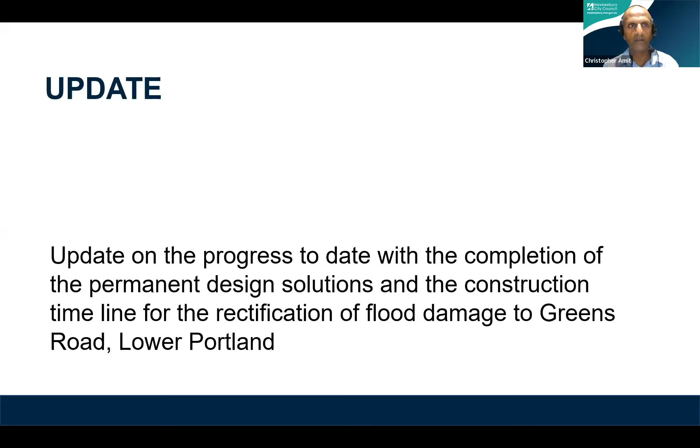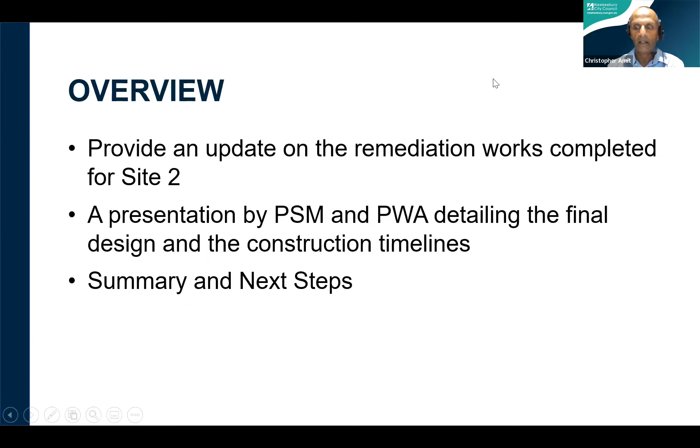So just as an overview, what I'll take you through is give you a bit of an update on what we've done at Site 2 to date, the presentations from PSM and Public Works, outlining the final design and the construction timelines respectively, and we'll summarize and look at some of the next steps.

So just as a bit of background and context, we've got the two sections of Greens Road that have been damaged. At the bottom of that image is site 1. We're showing you now the lengths of works that we'll actually be undertaking as far as the permanent works go. Site 1 is currently open and operating with a 5-ton limit.

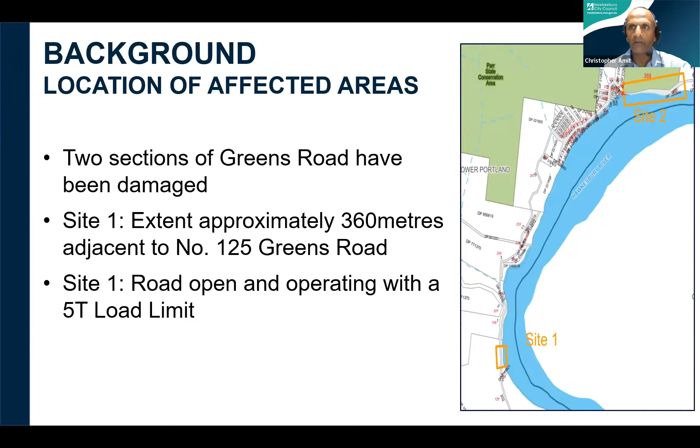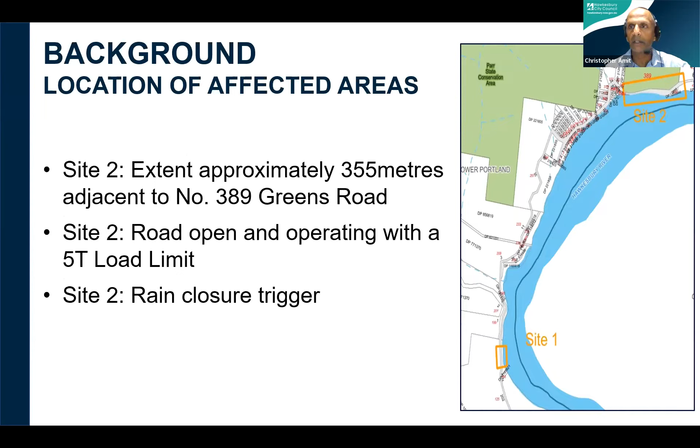So site 2, the extent of works we'll be needing to do is about 355 metres. That is also now open and operating with a 5-ton limit. We do have the rain closure trigger, as you'd probably all be aware of.

Just with the remediation works, to summarise since we last met: since the 19th of October, it's been open with a 3-ton limit during daylight hours. We've had that trigger with the rain events, and we've recently had that change from 10 mil to 20 mil over 24 hours.

That's certainly a positive move for us. We've been able to increase the operating tonnage to 5 tonne as well since the 18th of November. And since the 1st of December, we've had 24-hour operation.

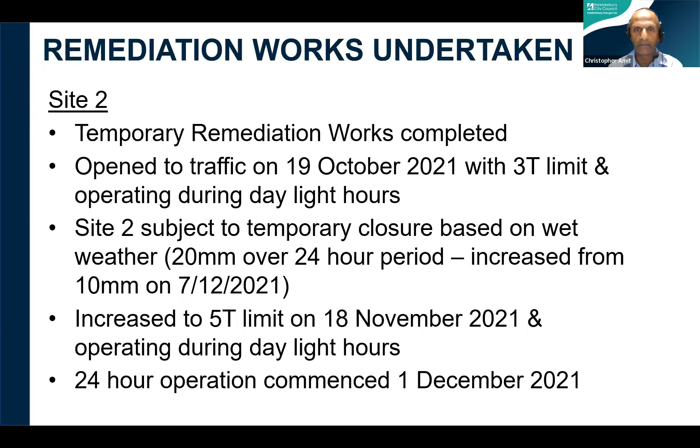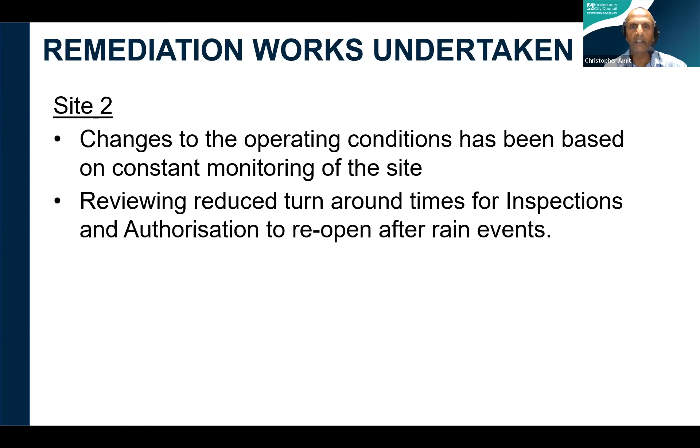Some of these changes we've been undertaking with the operating conditions have been based on constant monitoring. The site's monitored every day — at some points, if it's raining, every hour we're looking at the whole site. We're also reviewing reduction of turnaround times for inspections and when we can reopen, especially after rain events. I guess all of this work is really about continual improvement in how we're undertaking these measures at site.

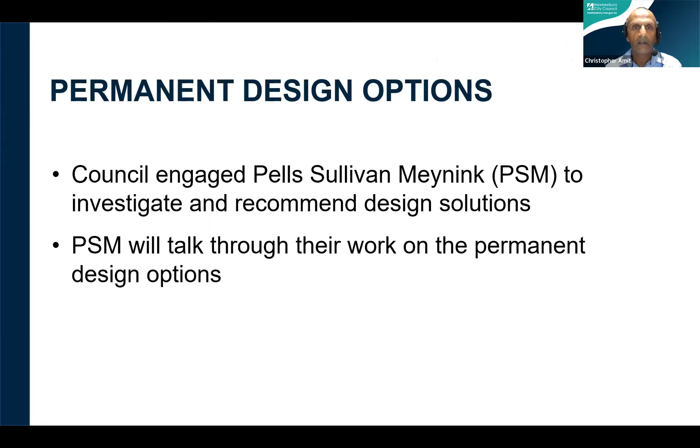2. So with the permanent design, we've got Pells Sullivan Meynink, PSM, who've presented to you before. They've done the remediation work designs, and what I'll do now is hand over to Gareth, who'll take us through some of the details in the actual designs they've done to date.

Thanks, Chris. Welcome everybody, I think I've met quite a few of you virtually online now, which is good. I'm not going to speak for too long, just going to give you an update of where we're at.

As Chris has mentioned, there's been quite a lot of advances that we've made along the way. There's still more to go — I know we're still working hard to keep reviewing where we're at. The monitoring has been very helpful for us to know where things have changed and where they haven't.

For example, that 20 mil increase in the rainfall trigger that we updated is based on that monitoring — it's based on seeing what happens when it rains. We had a small slip not that long ago, but we were able to look at what the event was that caused that and work around coming up with an improved trigger, as that's where we want to be. We want to get this road back into shape.

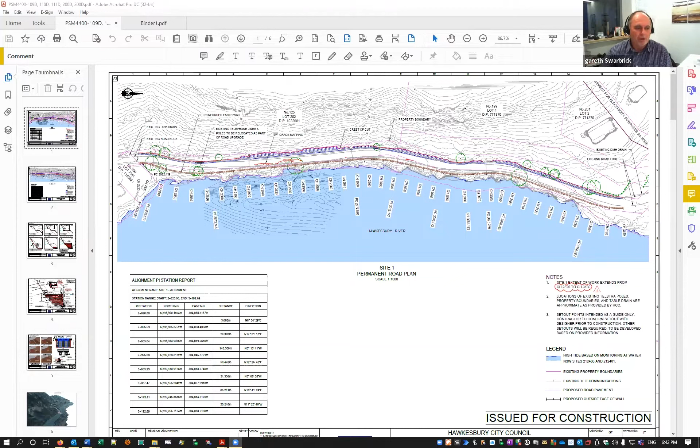On the design side, we've now finished our design, ready to go to tender. There's 50 drawings, so there's been a lot of work put in — not so much by me, but others in my team, Greg Fazone who's online, and Jeremy Toe, who's also been assisting with a lot of the review work. I'm just going to take you through 5 of those drawings to give you a bit of a flavour for where things are at.

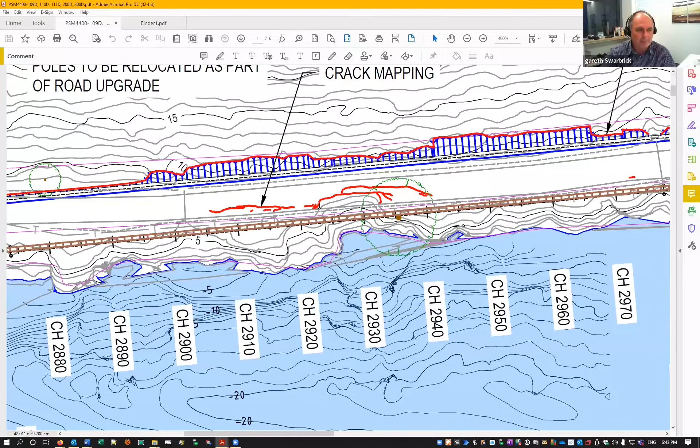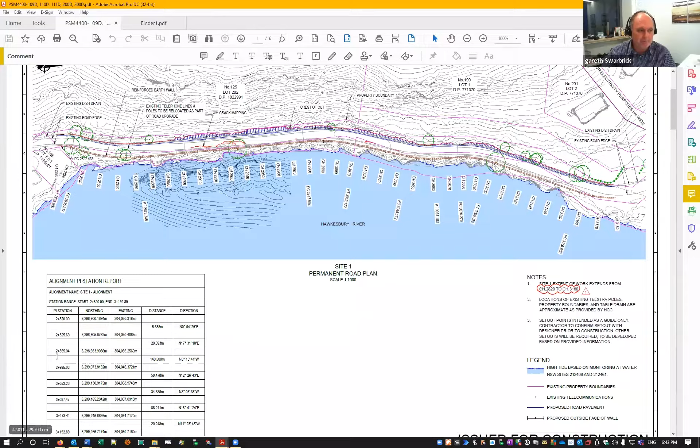This is the Site 1 overview — hopefully it's sharing okay. The Site 1 overview tells us where we're going to be doing excavation on the site, some of the existing cracking we've seen there, what the road alignment's going to be, and different areas of how we're impacting the different properties, making sure we're keeping well clear of those. That gives you an overview of where that alignment's going to be, and we've got the locations ready for the contractor to work with to construct the road in place.

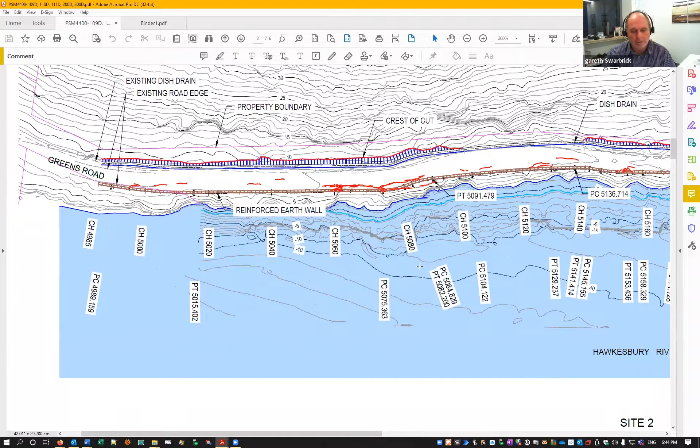This is the Site 2 alignment, very similar to Site 1 in terms of the layout — where we need to cut into the slope and secure it, where we don't, and where the edge of the main wall we're building is going to be, plus other little bits and pieces. There are other drawings showing more detail around drainage and other features that will be part of the road, but these two drawings give you an overview of the changes and the extent of that.

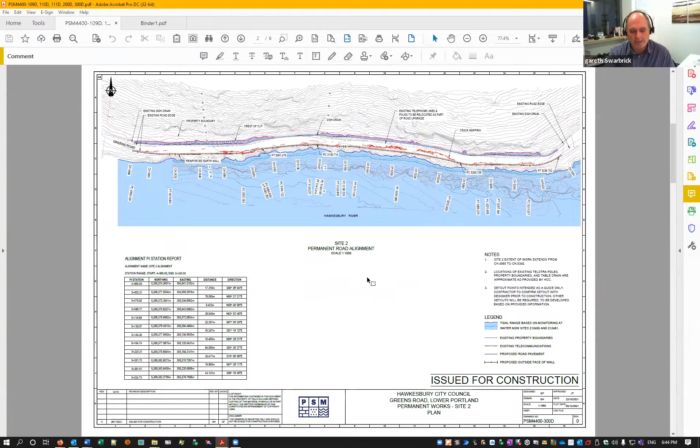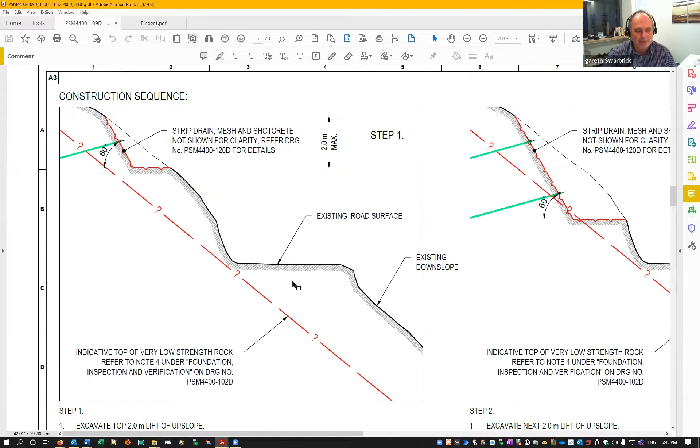If I go into a sequence similar to what we had last time, what we need to do to implement this design is cut into the existing slope. Given that we have a road down here as the only access to the site, we have limits as to how much load we can put on this road, which limits how high we can reach to cut the slope. That's factored into the design. We cut the slope down to get to good rock.

As we go down, we're doing what's called soil nails, which go into the slope, like these green lines here. They are grouted in under specification. Once we get down to the road level, the excavation continues below that.

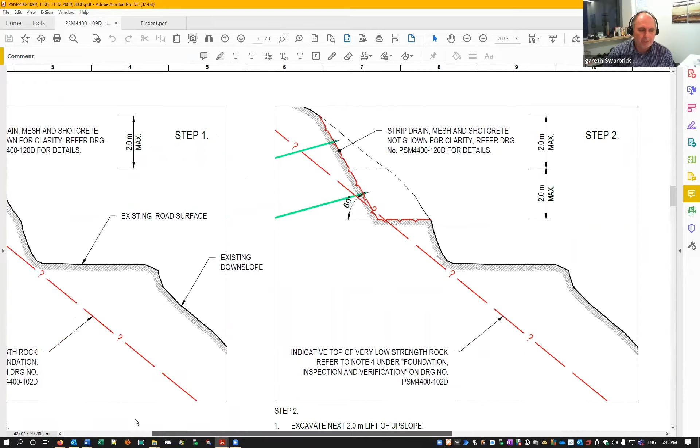This is the area where we're going to create a space to build an engineered structure, which will be the foundation of the road. Once we finish our excavation, we build up this wall using special, very large, heavy blocks - I think they're 400 by 400 by a meter or so. Greg can correct me, but they're not like your average retaining wall blocks. They're much more substantial.

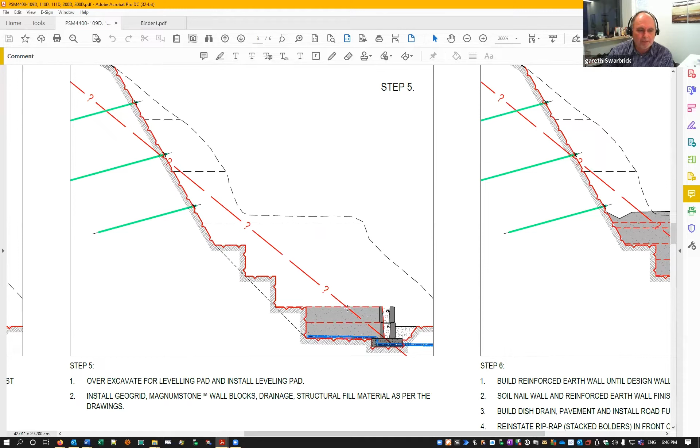Behind these blocks goes purpose-selected earth and reinforcing that goes behind there as well, and that gets built back up to our road. So we end up with quite a steep face, which is then protected from things like floods. There's drainage inside the road with various places needing pipe work to divert rainfall and those sorts of issues.

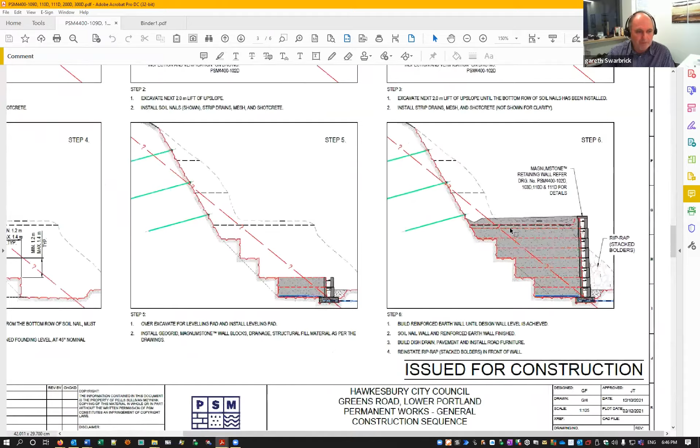That gives you an idea of what the section looks like along the road. I've also got a close-up of some of the detail that's gone into what that drain looks like, the reinforcement of the drain, the different type of drainage we need to put inside this slope to keep it stable, and the drainage inside the road itself.

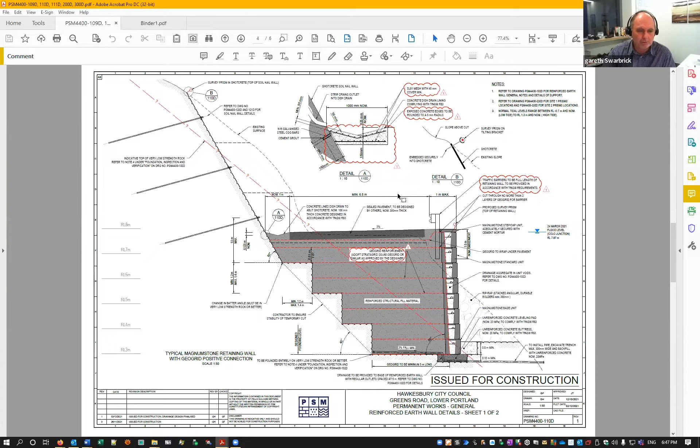This is accompanied by additional sheets of specification for these different elements - what type of blocks can be used, what specifications they need to meet, the backfill requirements, the reinforced earth requirements, other reinforcing in the drain and pipework, etc. So that's all part of this design.

To make this easier to view if you're not familiar with sections, let's look at a perspective view of what this looks like. Here we've excavated down to our starting point, which depends on where the rock levels are because they vary across the site. Sometimes we have to excavate relatively deep into the existing road, but still above the water line.

All of this design factors in the typical water level, because we have to work with the typical conditions adjacent to us in the river. Sometimes we don't need to excavate as far because there's good rock not as deep down.

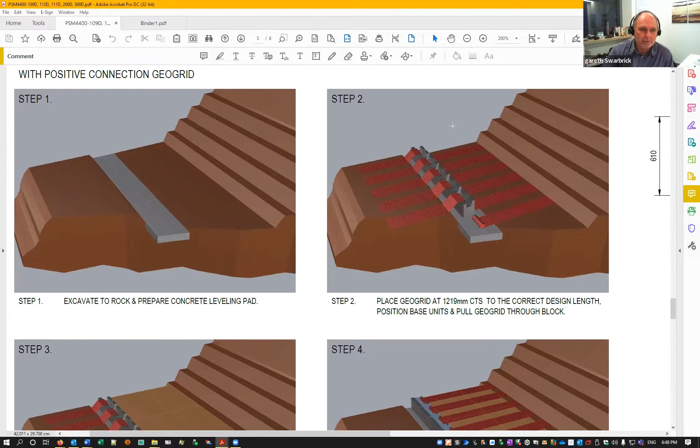Once we get down to that founding level, there's a concrete strip that goes down as a base to start our block work. The block work comes in with the first line shown here. There's reinforcing strips that are actually threaded through the block work and back around the compacted material.

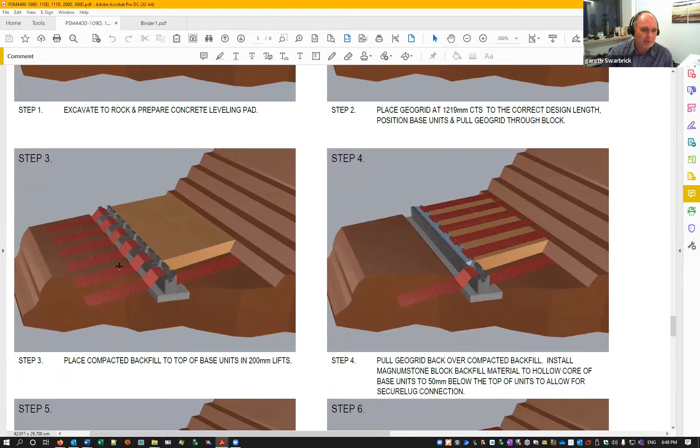Once the first strip goes through, compacted material goes behind it, designed to be strong but also free-draining to deal with the environment it's placed in. Those strips get folded back over the top, and the whole process is repeated with another line of these very large retaining block structures. These blocks interlock into each other and are reinforced back through the earth as well, so it ends up being a very stiff and strong structure.

So that was really all I wanted to go through with you. You've seen parts of this. It's really a matter of detailing all of this and doing all the design checks - that's what we've been doing lately to make sure it can go out and be built, and that it will perform its function, giving us the design loads we need, according to Austroads loading guides for standard loading.

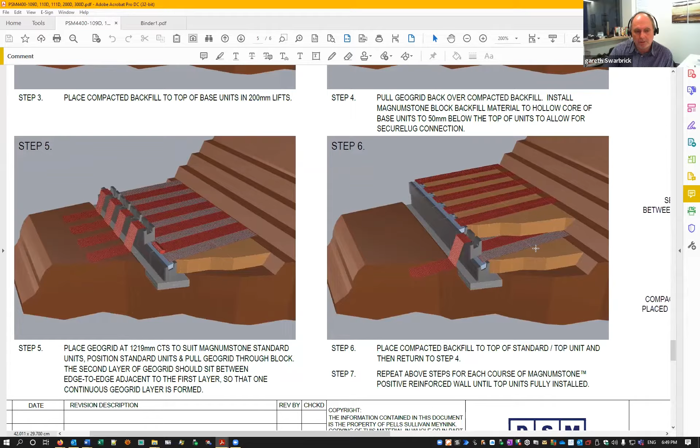So we've really had to balance up. Yes, we'd love to be able to do that, but we have practicalities which limit our ability to cut into this slope. So we're doing two things at once: giving us some room where we can, but also rebuilding this environment here with a much more stringent and properly engineered structure.

That's all I really wanted to go through with you so far.

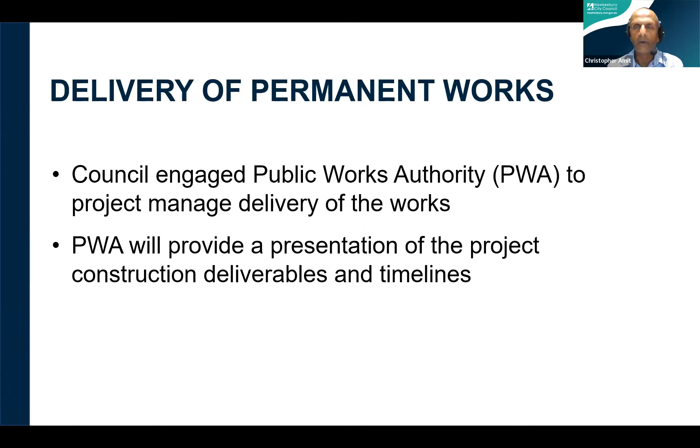So we're moving right along. Just with the permanent works and delivering the permanent works, we've engaged Public Works Authority, who will take us through some of the timelines they've worked out in delivering what's now being designed by PSM. So I'll hand over to Peter Hogan to present on that.

Thank you, Chris. I'd like to say I'm very pleased to be here tonight talking to the community about this project. My name is Peter Hogan. I'm the Director of Capital Projects with Public Works Advisory. We are a government agency that specialises in delivering government projects. We do a lot of work with government agencies and with local councils around New South Wales.

One of the processes that we're doing is to seek planning approval, and we do this through what's known as a review of environmental factors, an REF. We're procuring the REF, and that should be finalised in Feb 22.

For the Greens Road construction tender, the draft copies of the tender documents have been completed, and we are reviewing them currently with council and internally. The anticipated date for calling tenders is next week, Tuesday the 14th of December. We will have a 6-week tender period, which will span across the Christmas shutdown. The anticipated tender closing date will be the 25th of January next year.

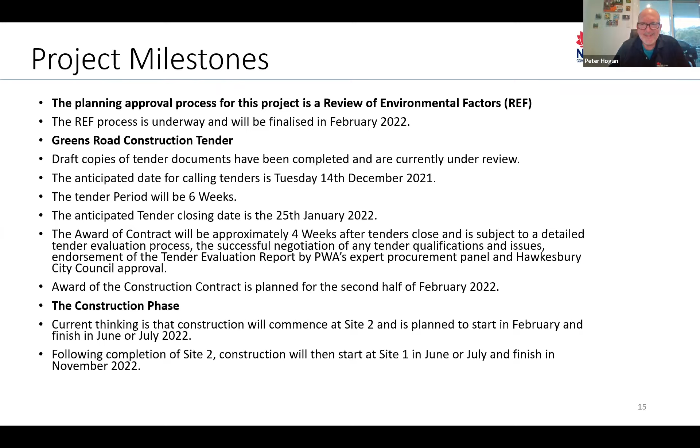Oh, back with you, Chris. That's okay, it's just...

Council and public works are very aware of the community's wishes to make this construction process as short as possible. Nobody wants to put the community through any longer inconvenience than necessary. We looked at suggestions to increase the width during construction to allow cars through, but that's been assessed as unsafe and not a practical option.

So we're looking at other ways to reduce the delivery time. At the moment, we're thinking it's going to be in the order of about 34 weeks from start to finish, about 16 weeks in each section.

We're also looking at the possibility of extending working hours on site and working days. So we're talking about extending work to maybe 6 days a week, possibly from 7 in the morning until 10 p.m. at night. But to make this possible, it would follow consultation that Hawkesbury City Council would have to have with the community, and may include residents on the other side of the river who will be affected by the works. This is an avenue Hawkesbury City Council are following up on at the moment.

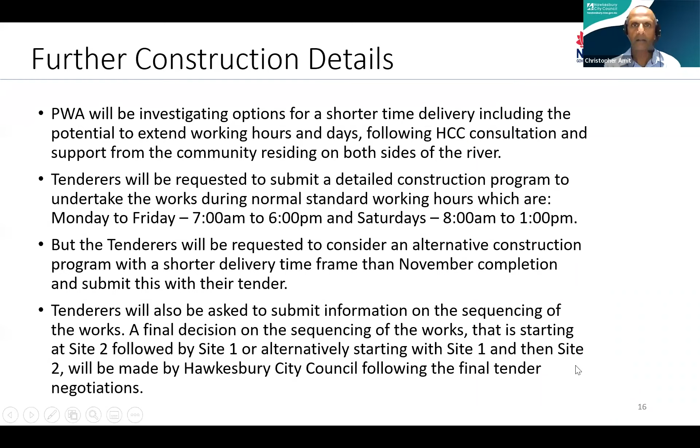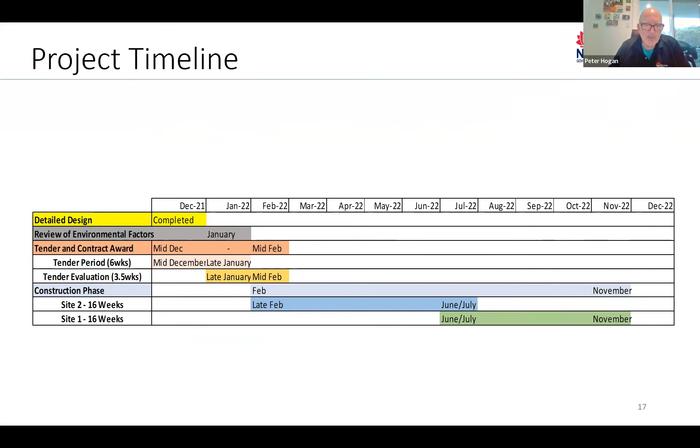The last slide Chris is looking for is just a graphic representation of the program we've been describing. As we've discussed tonight, we're getting the REF processed. We're looking at a tendering period and up to award from mid-December to mid-February, and we are looking at a construction period that will possibly extend from the end of February up to November.

We haven't decided yet on the order of the works, and we are hoping that they will take approximately 16 weeks for each section. Given the likelihood of some wet weather that may slow down the works, and other things that may be encountered once they start digging into the side of the embankment, it could slip a little bit one way or the other.

Finally, we will know and be able to report back to you once we have completed the tender and had detailed negotiations with the preferred tenderer who will win the contract, about the timeframes involved and what they can do to speed this process up. That's all I have to present for you tonight. Happy to answer any questions later on in the evening. Thank you, Chris. Thanks, Peter.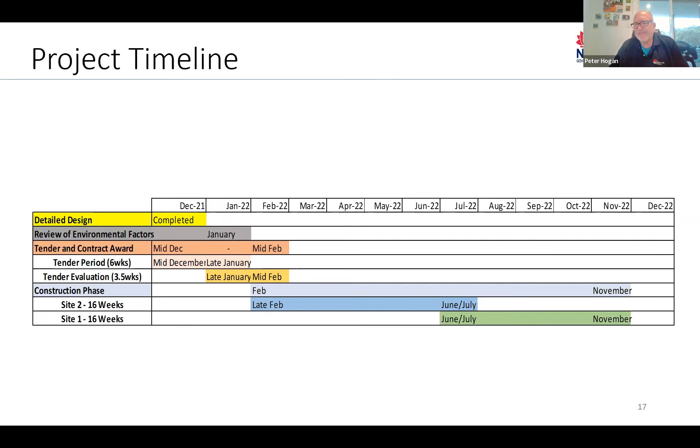So just following on that, and talking on that sequencing - at this stage, from previous discussions we've had with other meetings, the current way of thinking is we're looking at Site 2, where we're undertaking the permanent works first. So in summary, Site 2 will be closed when those works are being undertaken, and during that period of time Site 1 will remain open during the works.

Once we've completed Site 2, we will then be able to commence Site 1, at which time Site 1 will be closed for that duration, as Peter indicated, as we're looking in the tender, and Site 2 will be open to traffic. So this is the current way of thinking. I know we've had many discussions on that sequencing, but we are seeking from the tenderers information on timelines and how things can work on that, and we can certainly get back to you on that.

So I'll just hand over to Will Barton, who's going to take you through some of the other issues in relation to the project.

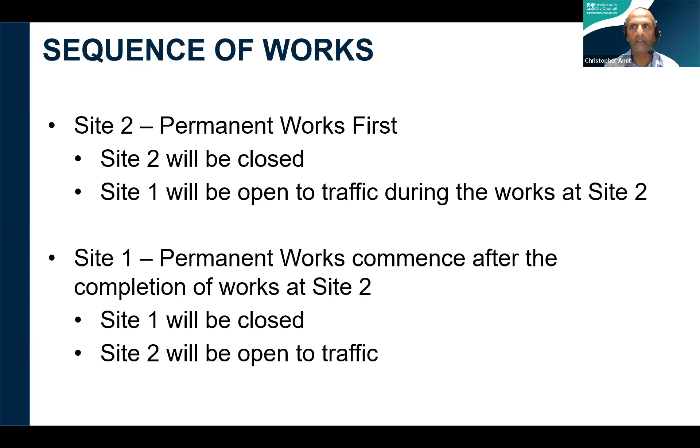This is my 4th week, and day one I had the privilege of going out with Richard to inspect both sites on Greens Road. In subsequent meetings with the community, one thing raised a few times is the bends on the eastern end of Greens Road on the climb out from Greens Creek, and whether it's possible to improve that section of road while rectification works on these two slips are occurring. We thought it worthwhile spending time to talk through that option.

It's a project we've previously identified, works on the bends to improve the surface and provide some protection for off-road vehicles, essentially crash barriers. Given the confinement of the site, works would require a full road closure to provide sufficient room for plant to move about, material delivery and safe working conditions. That has significant implications for the community, and with restoring or preserving access our number one priority, the last thing we want is to commence a project which risks isolating anyone along that section of Greens Road, or any section.

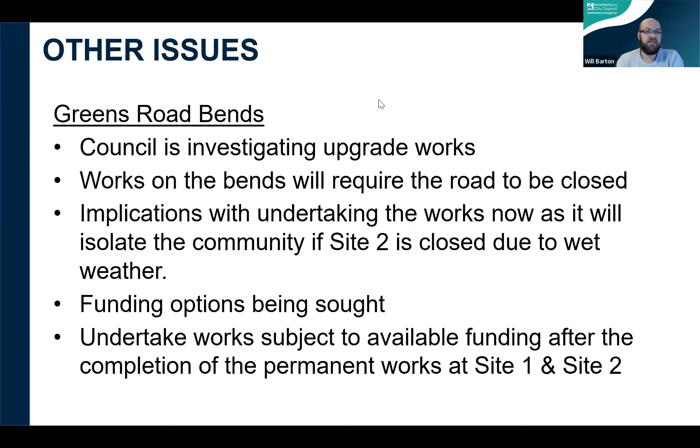Next slide please, Chris. Technology is just Gremlins in the system. Yeah, sorry, it's one of those nights. Apologies everyone.

While Chris is looking for that slide, some other issues raised are the condition of the track along the Wheelbarrow Ridge access track, or trail. This trail runs through the national parks, and my understanding is there's significant endangered species on either side in sections, making it difficult to get in with heavy plant to undertake maintenance in a short time frame. What we can do, and have been doing, is get in and do some minor maintenance and pothole patching when we've been alerted to the condition of the track.

What we've done is switch to a more proactive approach where we now routinely inspect it, and that will carry through during the restoration works, particularly on Site 2, to make sure we're not waiting for it to deteriorate to the point where the community is at risk of complaining. We're in there looking at it regularly to make sure it meets the level of service it needs to, keeping in mind it's still a trail and will be handed back to national parks at the end of this.

In terms of higher degrees of maintenance, getting a grader in, national parks have been quite cooperative, but there are some approvals we need to get through to do those more significant maintenance works.

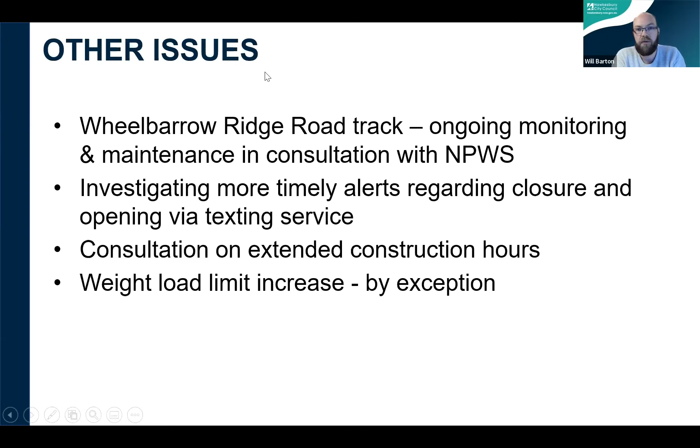As Peter mentioned, consultation will be undertaken on the extended construction hours in the hope that will expedite the reinstatement of both sites. The final thing we're looking at with PSM is the opportunity to introduce, by exception, increased weight load limits. So if there's a particular need, we can work through protocols on how to get vehicles over and above 5 tonnes through either of those sites. That's what we're working on at the moment, ahead of the restoration works in February, March.

In terms of the summary, we've completed the design for both sites, as Gareth presented tonight. The REF is well underway, and the tender for the works will be released to the market next week. The commencement of permanent works at Site 2 will begin around end of February, with plant on the ground a week or two after that, and an estimated completion in June or July. Assuming the contractors don't come back with any novel, innovative way of tackling Site 1 first, we'll commence works at Site 1 in the middle of next year, with an estimated completion of November 2022.

And I believe it's now over to Q&A. I'll open up. Thank you, Will, Gareth, Peter and Chris. There was a fair bit in that, and I'm now happy to take any questions or comments, concerns, whatever they might be. So if you don't mind just popping up your little virtual hand.